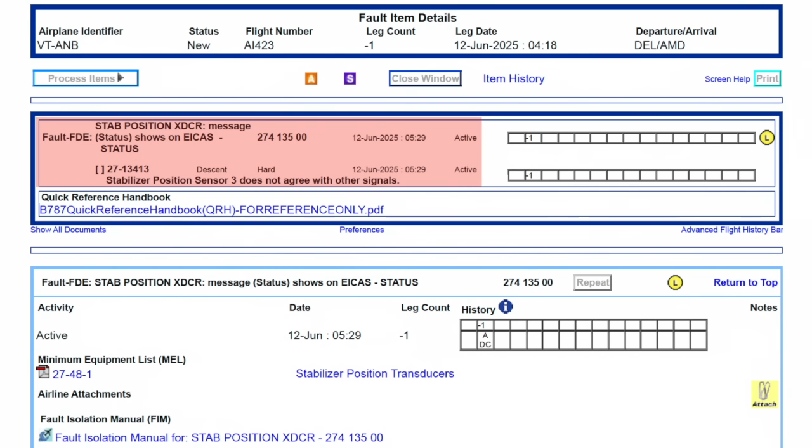There can be no final report until the FDR data and CVR transcript are made public. Meanwhile, we have data from the ACARS system, the aircraft maintenance computer, ATC, FlightRadar 24, and the airport CCTV. On this channel, we have published all this data together with our analysis. Welcome to Independent Aircraft Investigations, my name is Richard Godfrey.

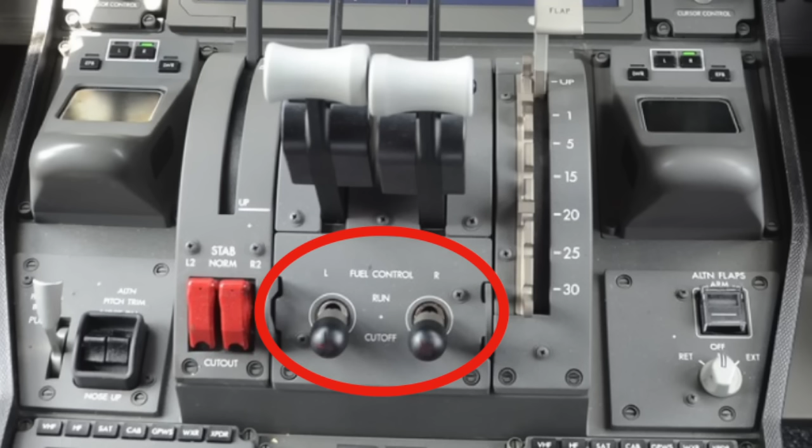The preliminary report disclosed the switch transition timeline, but not the full engine response timeline. That distinction matters. If the fuel switches were moved as part of a dual engine loss procedure, the sequence cutoff to run is not in itself abnormal. What matters is whether there was evidence of a preceding loss of thrust, loss of electrical generation, FADEC auto-start behavior, or other failure condition before the switches were touched.

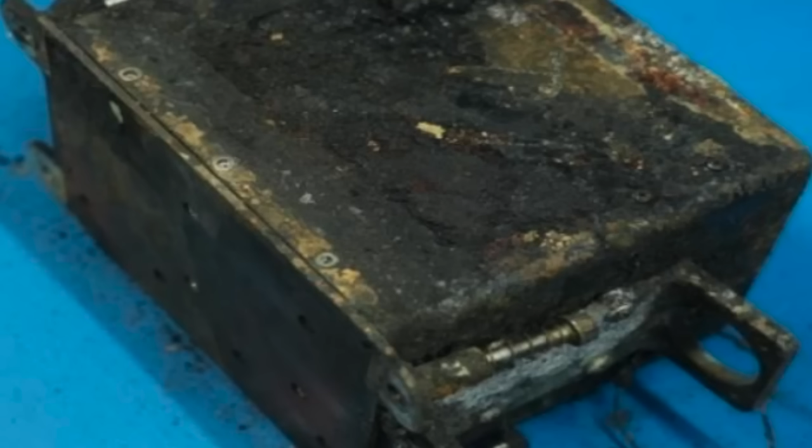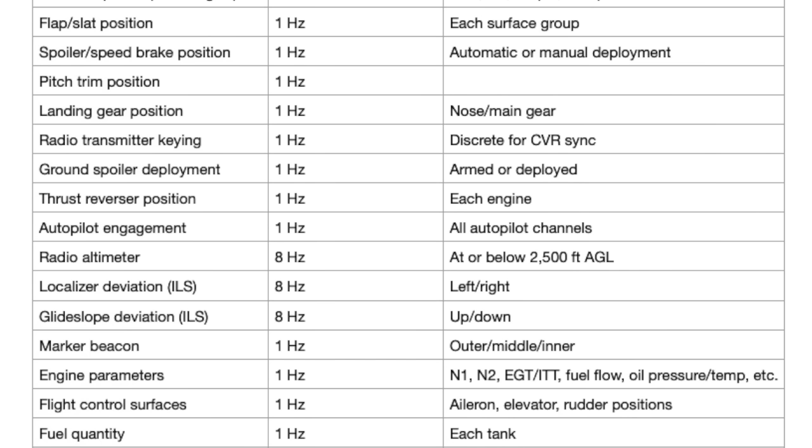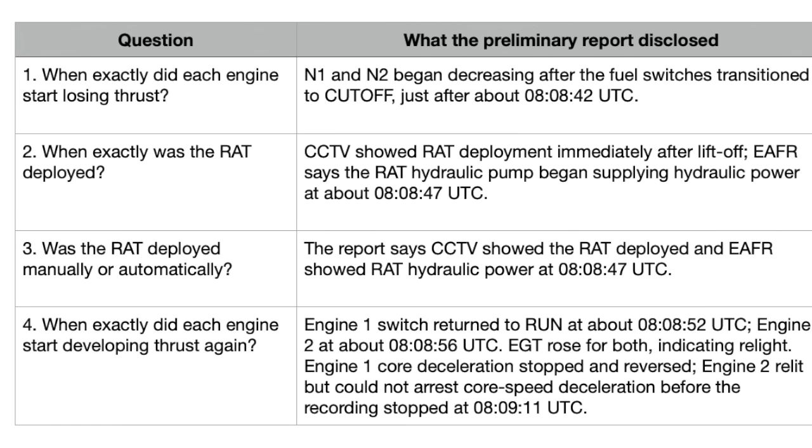By 24 June 2025, AAIB India had access to the accident flight FDR, EAFR data and cockpit audio. The preliminary report therefore appears to have had access to the data needed to answer, at least in principle, 4 safety critical timing questions. These omissions are material because recycling both fuel control switches is consistent with the Boeing 787 dual-engine fail-stall memory procedure. Without the preceding and subsequent engine response data, the switch movements cannot be properly interpreted in operational context. There are 4 unanswered questions which should be answerable from the FDR EAFR data.

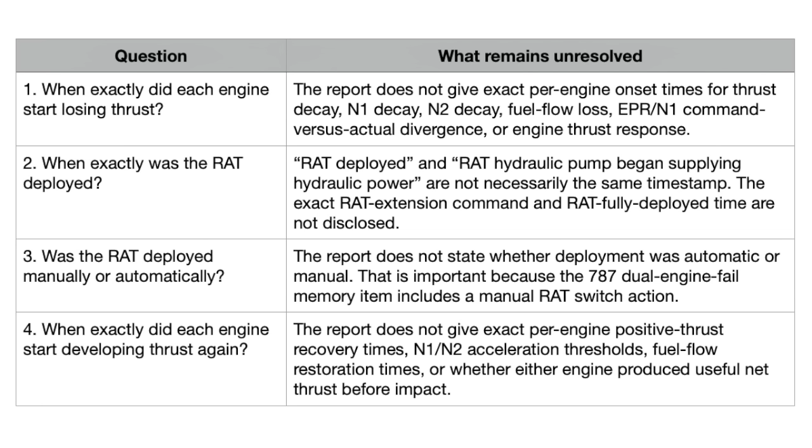Number 1, when exactly did each engine start losing thrust? Number 2, when exactly was the RAT deployed? Number 3, was the RAT deployed manually or automatically? Number 4, when exactly did each engine start developing thrust again?

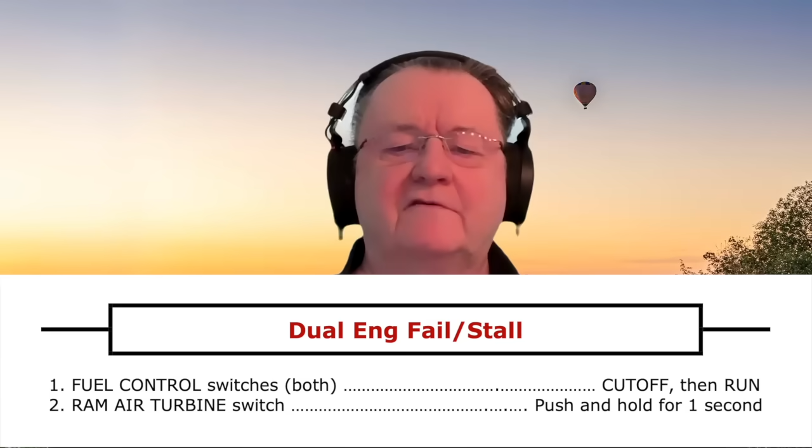Publicly reproduced Boeing 787 memory item material shows that the dual-engine fail-stall memory item includes selecting both fuel control switches cut off, then run, followed by manual RAT deployment if required. Number 1, fuel control switches, both cut off, then run. Number 2, ram air turbine switch, push and hold for 1 second.

The FAA's engine control certification framework is intended to prevent unsafe, uncommanded, or uncontrolled thrust or power changes, including in failure conditions in any phase of operation: engine start, taxi, takeoff, climb, cruise, descent, approach, or landing.

The FAA engine control safety logic is as follows. 14 CFR paragraph 33.28 governs engine control systems. It requires failures of aircraft supplied data or power to be detected and accommodated, and the accommodation strategy must not result in an unacceptable change in thrust or power.

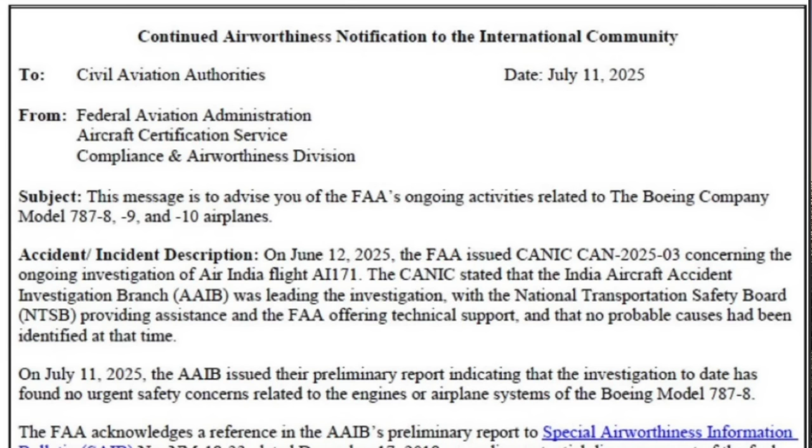FAA guidance identifies uncontrolled or uncommanded thrust or power change as a hazardous engine effect. And why this matters for AI171: the FAA paragraph 33.28a requires the EEC control system description to document normal and failure condition behavior, alternate modes, EEC power interrupt tolerance, and the relationship between the engine control and aircraft systems.

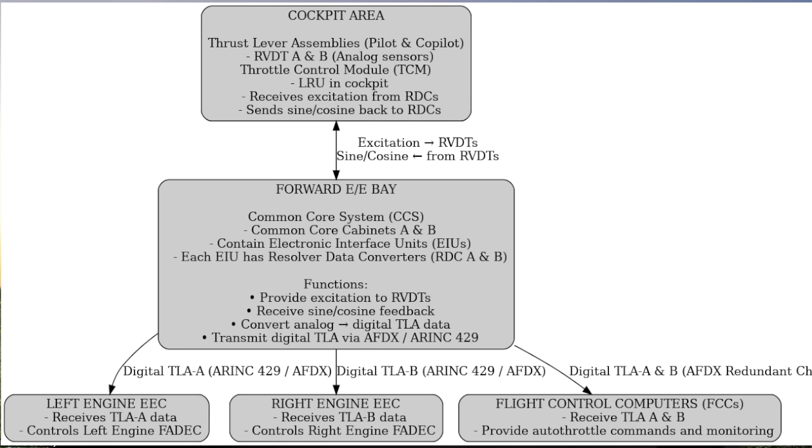Therefore, questions about EEC response to aircraft-supplied data, power interruptions, throttle resolver data, CCS links, and engine shutdown commands are certification-relevant questions, not speculation. The manufacturer's documentation describes fail-safe EEC logic consistent with the FAA certification objective of preventing unsafe, uncommanded thrust.

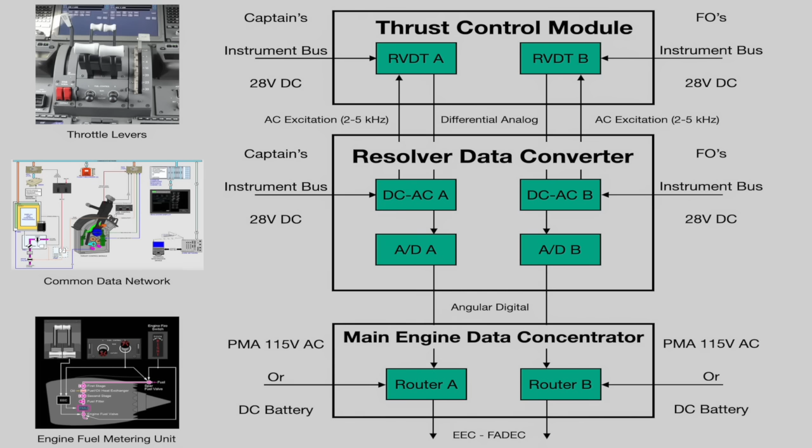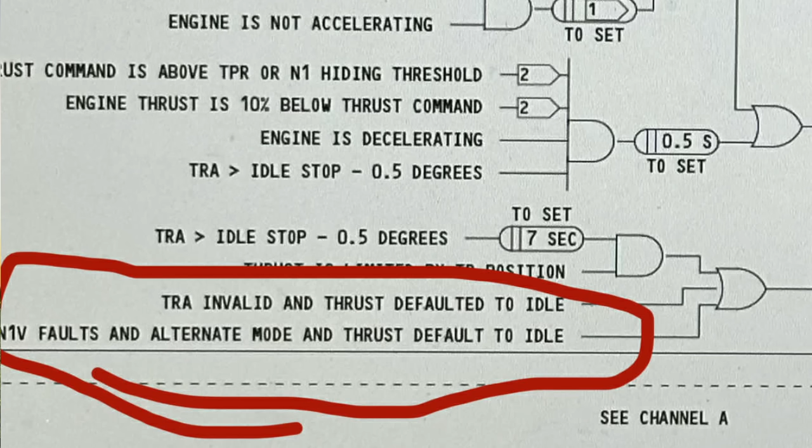The Boeing 787 FIM 732100 EEC fault isolation manual states failure of both CCS data channels results in engine shutdown commanded by the EEC. The GEnx-1B EEC system description, ATA 73-21-00, states, upon loss of valid throttle resolver or CCS link data, the EEC commands the fuel metering valve closed to prevent uncommanded thrust.

The AAIB issued an interim statement, officially released at 5:53 p.m. Indian Standard Time on 12th June 2026, marking the first anniversary of AI171, and expressed condolences. It said the investigation had made significant progress, and that the final report would come only after all investigative work and international review processes were completed.

The reaction to the AAIB statement appears to have been mostly negative or skeptical, especially from families, pilot representatives, and aviation commentators. The families' reaction was frustration and mistrust.

Reuters reported that the update was met with skepticism from some families, with relatives gathering in Ahmedabad and asking why, after 365 days, the government still could not state the root cause. One relative, Tanay Gajar, said, 'It's been 365 days since the incident. The government should have been able to tell us the root cause of the crash.'

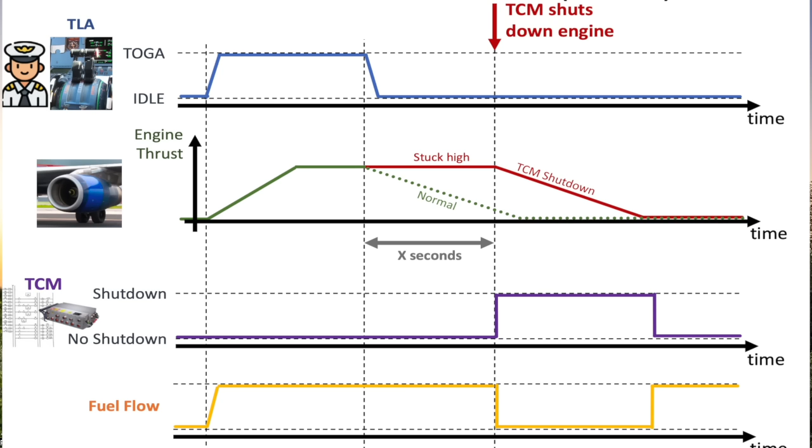Dr. Thomas shows a slide with an oversimplified example of a thrust control malfunction. The thrust lever angle goes from idle to TOGA. The engine thrust increases to a high level. If the thrust control malfunction detects a problem - thrust stuck high, thrust stuck low, or thrust data invalid - then engine shutdown occurs as the fuel flow is stopped.

The ANA-787 incident on January 17, 2019 involved a Boeing 787 with Rolls-Royce engines and a Rolls-Royce FADEC. There was a dual engine shutdown post-landing, caused not by engine failure, but by system logic in the TCMA that assumed ground state combined with thrust reverser input.

STPA has since been incorporated into both the FAA and the EASA system safety thinking and guidance, although its wider acceptance took several years. We are including a link to Dr. Thomas's presentation as published on the MIT website in the description below.

So what is our conclusion? The question is not simply who moved the switches. The question is what the aircraft and engines were doing before, during, and after those switch movements. Without that timeline, the public has been given a sequence of actions, but not the operational context needed to understand them.

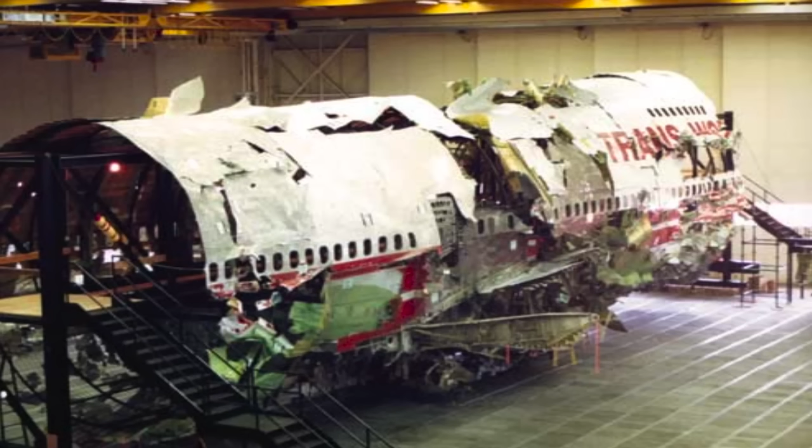In next Friday's episode, we'll look at the unanswered questions on TWA 800. The 30th anniversary of the crash is on the 17th of July 2026, and there is still no full disclosure of the NTSB, FBI, CIA, US Navy, radar, debris, and other evidence.